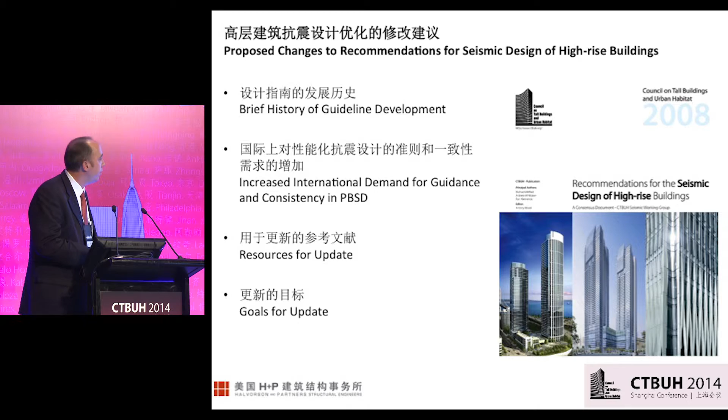Today I'm going to go through a brief history of the guideline development. We're going to talk a little about the international demand for guidance and consistency in performance-based seismic design. Then some of the updated resources we would have and goals for an update, and examples of what I would think should go into an updated guideline.

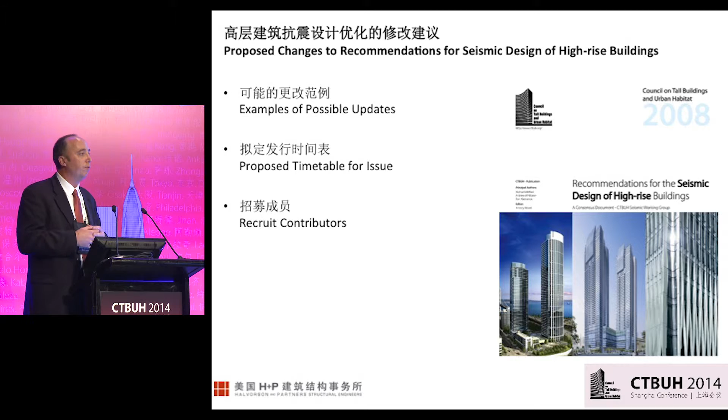A small group of authors would actually finally decide that and prioritize it. But then talk about proposed timetable and recruit contributors. I'm going to be here all week. I've already twisted Ron Klemencic's arm, so I think Ron is going to help out again also. My hope would be that people would come forward and talk about it, and see if they were really interested in helping out.

The original guidelines were produced as a result of a seismic working group formed in 2007. The co-chairs at that time were Ron Klemencic, Michael Willford of ARUP, and Andrew Whittaker of SUNY Buffalo. It outlined a performance-based seismic design approach for tall buildings.

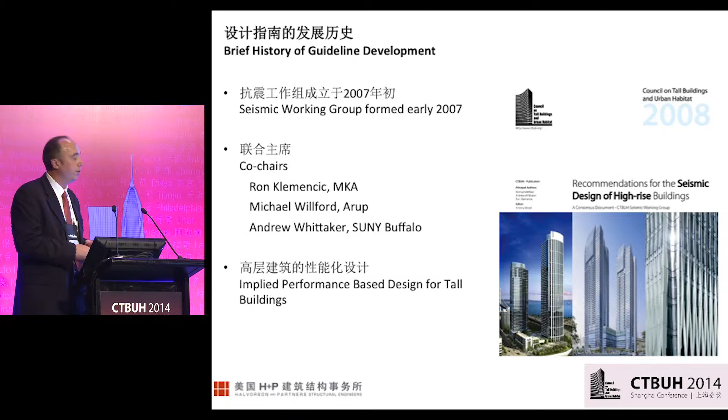The draft was published in early 2008. It was peer-reviewed, and the idea with the new guidelines is that it would also be peer-reviewed by a larger group that would hopefully be international, completed in August 2008, and published.

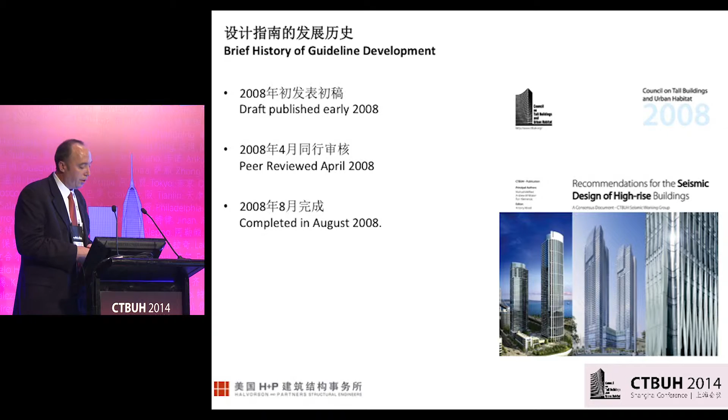Why focus on performance-based design for tall buildings versus prescriptive design rules? The idea is that you're dealing with structures that are well over 1 second in their period, so the code and prescribed rules are more geared toward shorter period structures.

Significant mass participation is in higher modes, and a larger proportion of the drift is due to cantilever action. So some of the interstory drift constraints and established criteria are based on shorter buildings where cantilever action is not as significant.

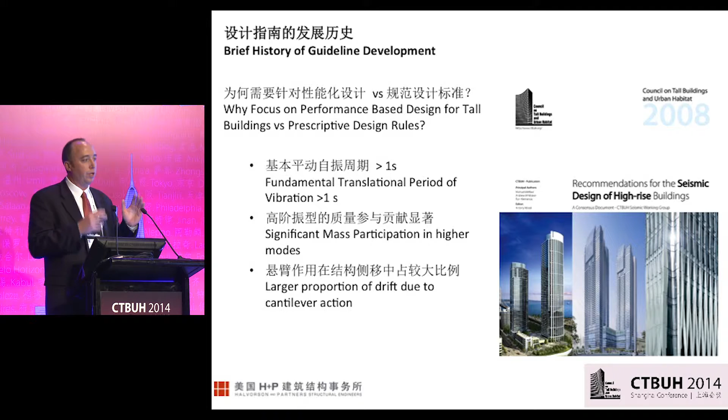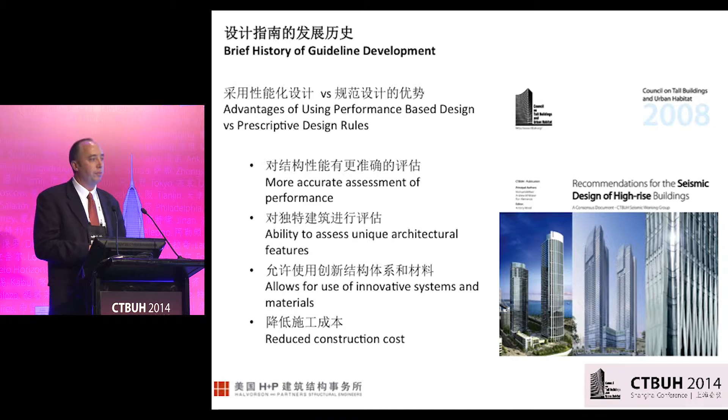The advantage of using performance-based design is a more accurate assessment of performance. It gives you the ability to assess unique architectural features and unique projects and structures. It allows for the use of innovative systems and materials, like what we were talking about this morning with supplemental damping, and here we've touched on a few cases of base isolation, and hopefully it reduces construction costs.

More disadvantages: it is more labor intensive and requires more time to complete, and it is a more extensive review. So these need to be taken into account in the schedule.

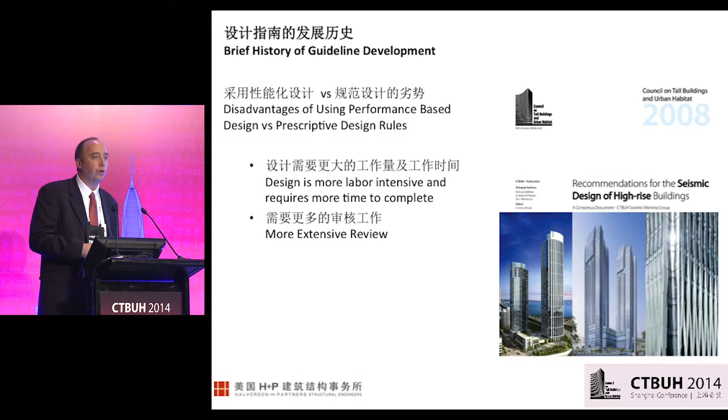Performance-based design should be an alternate or additional analysis and design method. International standards are moving towards having performance-based design for tall buildings as an alternate design method. Prescriptive local design rules and protocol are well established, and recommendations should be framed to offer this up as an alternate design, in my opinion.

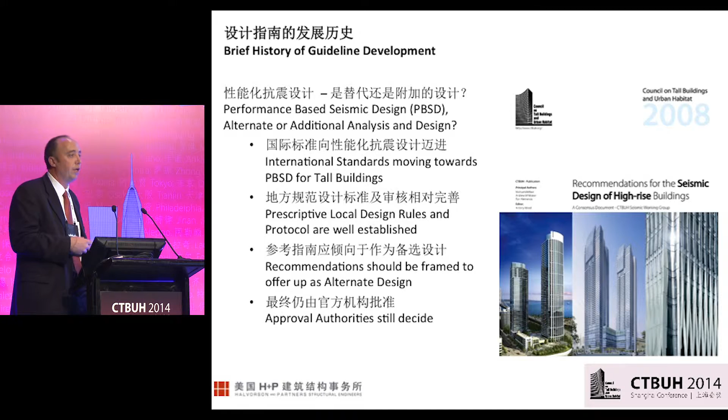But approval authorities still have to decide. Obviously you're dealing with places where the protocol and prescribed methods are very well defined. You can't mandate something like this.

There's increased demand for guidance and consistency in performance-based design. It's a rapidly developing field. The U.S. has significant projects now completed, and there's a few projects on the West Coast that now have been completed.

In China, the level of documentation has substantially increased. Most of my experience is actually with performance-based design working in China, and compared to what I had to document 8 years ago for an expert panel review compared to now, there's a lot more documentation that's actually included.

I'm also a member of the Earthquake Engineering Advisory Group for IStructE. They're looking at trying to get that institution more involved in international work. That institution has a number of members coming from China now who are looking to be licensed as IStructE. So IStructE sees that the influence of having more Chinese members is going to be necessitating them to learn and to be more involved in earthquake engineering internationally.

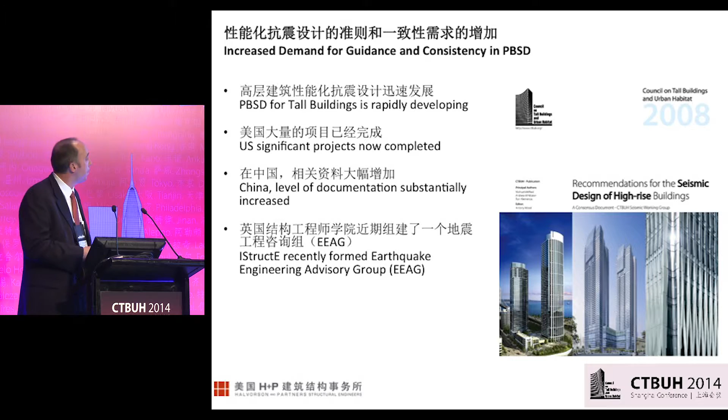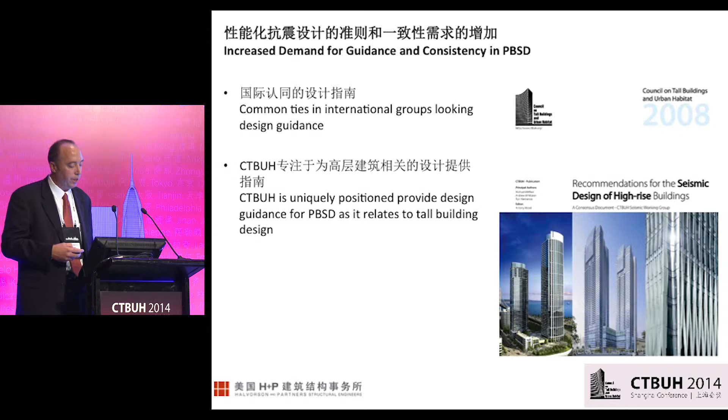There's common ties in international groups looking for design guidance. What I would say is CTBUH is uniquely positioned to provide design guidance for performance-based design as it relates to tall buildings. Some of the more recent updates exist now that didn't when the first guidelines were published in 2008. There's good general discussion on topics, but at some point they would bring up items that should be considered but didn't give a lot of design guidance on how they should be addressed.

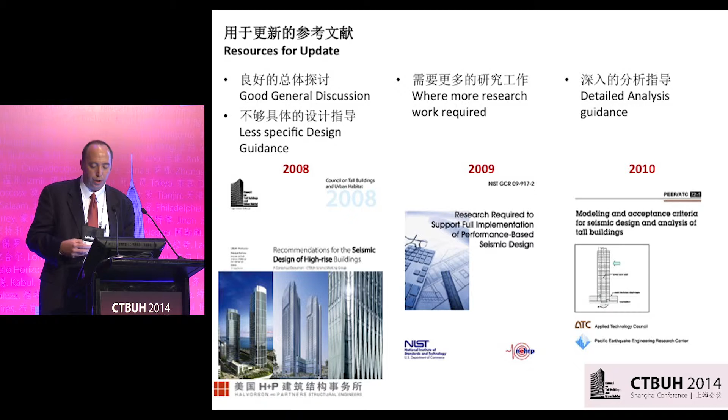In 2009, NIST published a report on research required for support of full implementation of performance-based seismic design. This document was used to produce a number of additional studies, one of which is the ATC 72 document, which details analysis modeling rules and guidance for performance-based design.

The PEER document was published in 2010, and this is a pretty extensive document that gives guidelines for performance-based design of tall buildings. This document is referenced by other documents too that have been updated. And then also in 2011, design guidance was given for selection of seismic input, giving some design guidance on picking time history records and getting the input right for time histories.

Additionally, in 2013, ASCE 41 was published, an updated version of that code. In that code, there's a lot of guidance given for component performance objectives, and that's a code I've seen referenced in some of the work we've been working on in China.

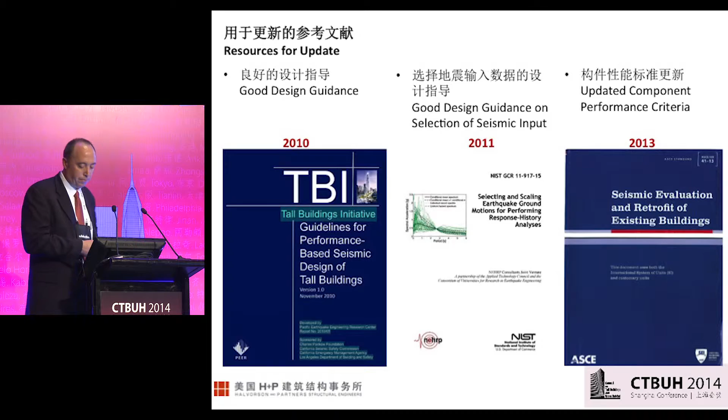But probably the best and latest document that's come out has been a 2014 publication from the Los Angeles Tall Buildings Structural Design Council. This is an affiliate member of CTBUH, and it's an alternate design procedure. The design guidance is good because it's based on the latest resources. It's a succinct design publication, only about 50 pages, but it's geared to designers and meant to be kept brief with good design guidance. Its focus is for designers, and practical simplifications are given for modeling.

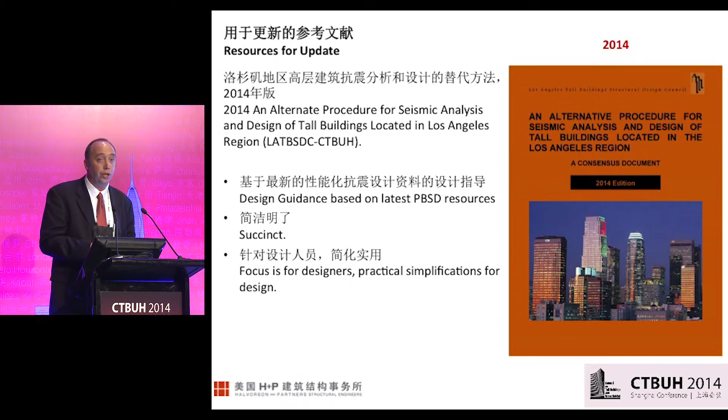One of the questions is whether the goals for the update should be an update or a rewrite of the current recommendations, and I think that's to be determined. Depending on who the authors are and how many are in the group, we'd make an assessment of whether we should be updating or completely rewriting. The final decision will be made by that group, but in order to make the document useful, a different flow may be required.

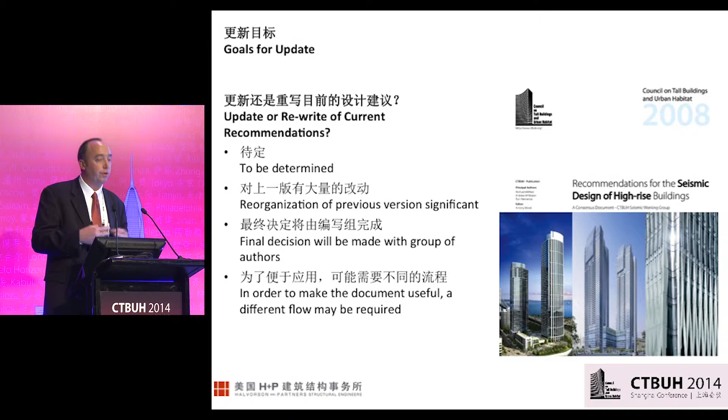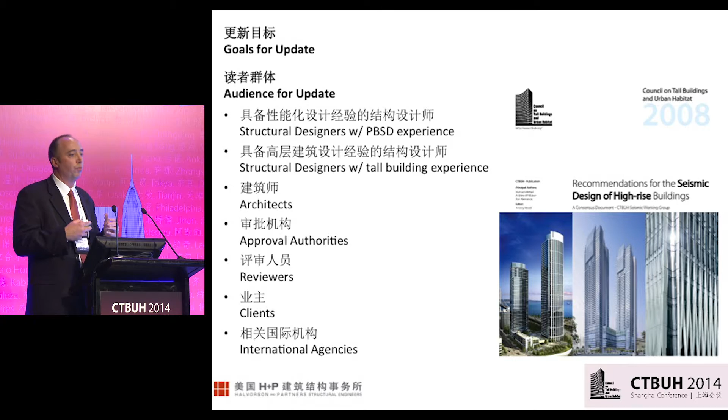The audience for the update, one of the ideas would be structural engineers doing performance-based design work, structural engineers with tall building experience, architects working on these types of projects, maybe approval authorities and reviewers, and even clients, so that they have an idea about how this type of design work influences schedule.

Focus recommendations should be on tall buildings. Performance-based design is used for all types of buildings, but the design guidance we're going to be offering is really going to be focused on tall buildings. And we should define when this type of design is required. Most codes have some type of height limit that requires an over-limit definition. This guide should also go into that and give a recommendation on when they think it should be used, and present it as an alternate procedure, but allow recommendations to be referenced as additional measures.

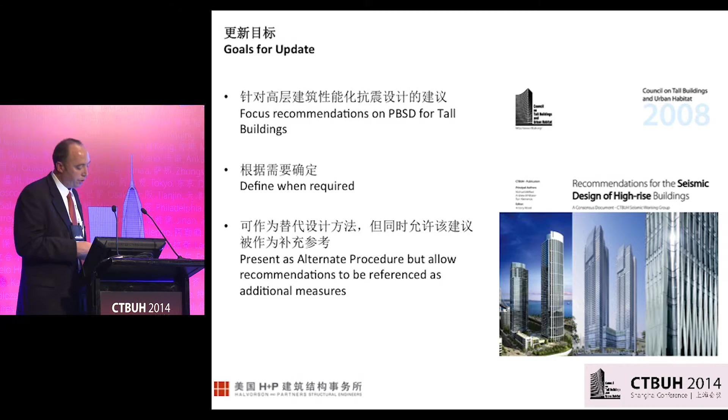Update it to reflect the current best practice. Another goal was to educate tall building experts with limited performance-based seismic design experience, bringing in a whole group of people who haven't done a lot of work in this field.

For instance, CTBUH is full of people doing this, and one of the ideas that organization has is actually issuing a publication like this as well. And then provide rules for consistency in performance-based seismic design analysis and reporting of results.

So much data is created when you do this type of work that one of the things you need to do is provide some guidance on consistent assumptions that should be made.

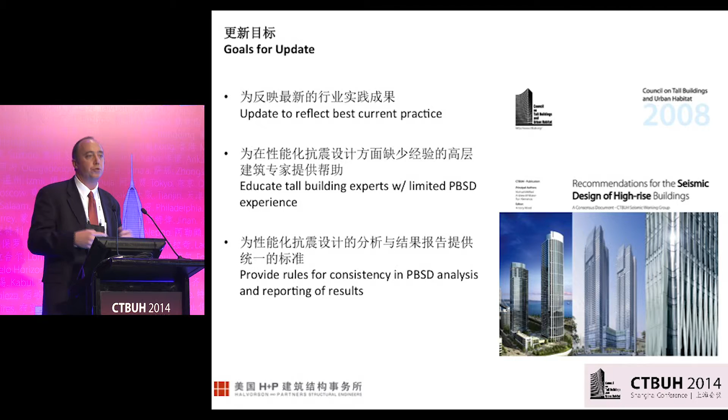Distinguish between performance-based seismic design and prescriptive rules. Some prescriptive checks still come into the design process, and the idea would be to define those and really distinguish them from true performance-based design.

Add figures and illustrations to make things easier to describe. Establish a format for the design criteria and suggest ways that criteria could be presented in a report.

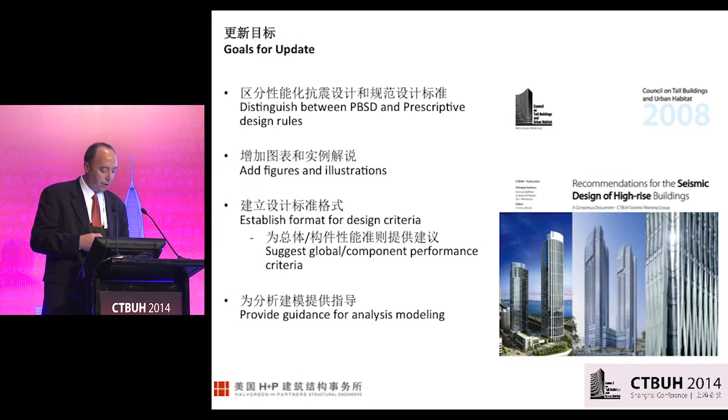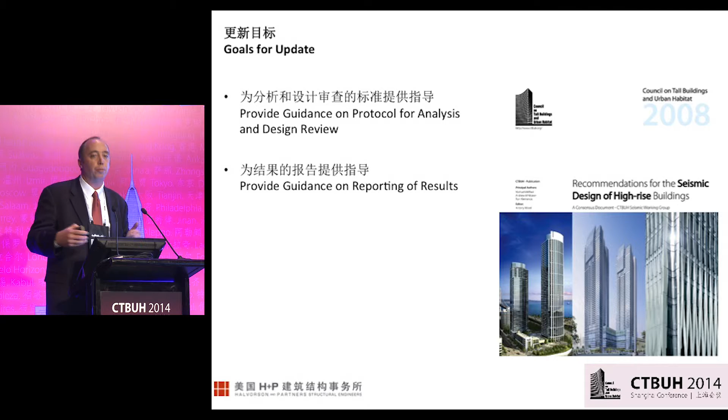Also provide guidance for analysis modeling, guidance on protocol for analysis and design review, and guidance on reporting of results. When you're doing this type of documentation, it's a large volume of work, so give some guidance about what elements should actually be shown and documented.

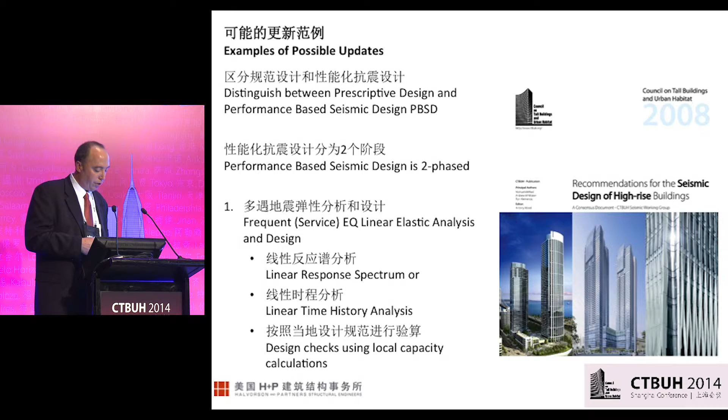Examples of possible updates. One idea was that many publications define performance-based design as just two-phased, consistent with the Chinese approach too, with expert panel review and over-limit design. There's a service level earthquake with linear elastic analysis and design, done by response spectrum or time history, and design checks using local capacity calculations.

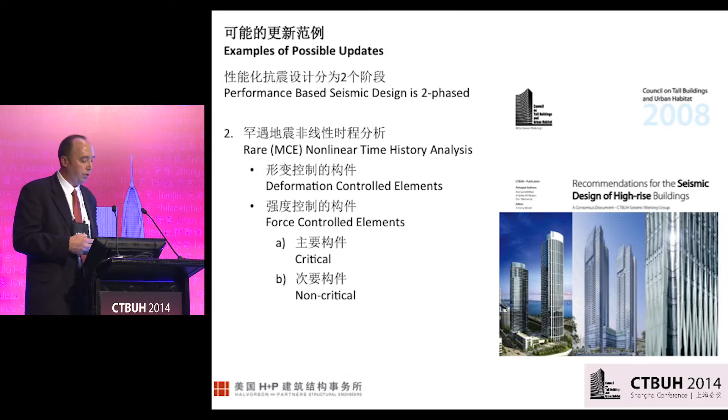Performance-based design then usually has a second level of analysis and design that takes into account the rare or maximum credible earthquake loading and nonlinear time history analysis, where you either define deformation-controlled elements or force-controlled elements, and then between those, even critical or non-critical elements.

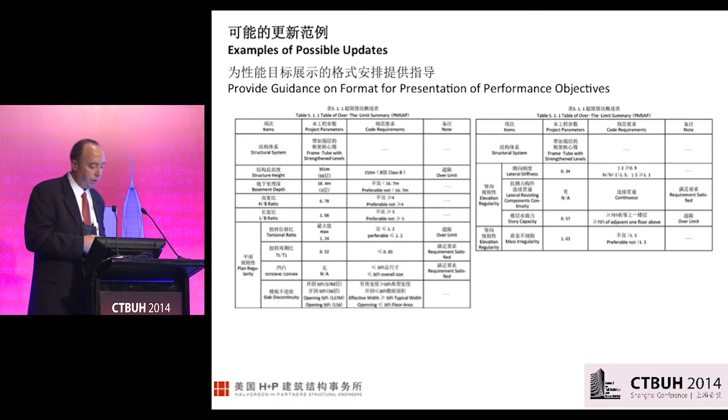This is pulled from performance objectives that were presented for global behavior, and this might be an example of a format that we could show in the report.

Taking that to the component level, where you distinguish between force-controlled actions and deformation-controlled actions, and reference different guidelines that are used for that.

ASCE 41, for instance, has a lot of material about deformation-controlled actions, for link beams or elements that are dissipating a lot of energy.

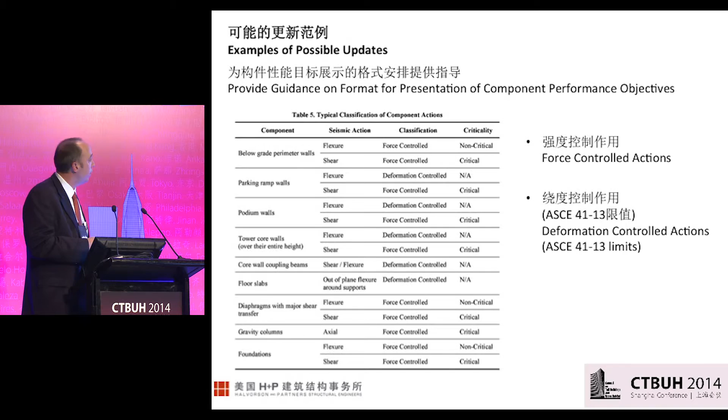And then this is a possible format, similar to one we've also produced before for expert panel reports.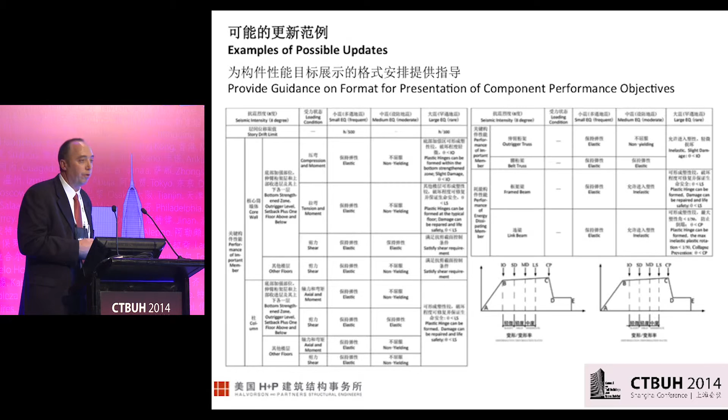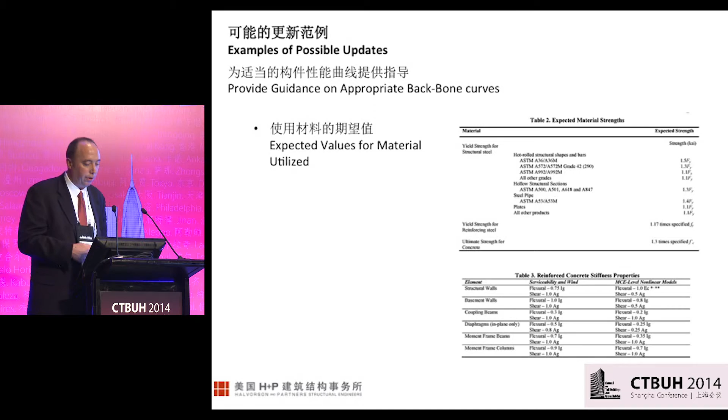When you're dealing with creating and modeling analysis for nonlinear analysis, expected values for material are utilized. So an idea about formatting that and setting it up as a more defined set of material properties.

Talk a little bit about how backbone curves are created and put this into the publication to give more design guidance on how they might be modified to take into account cyclical loading.

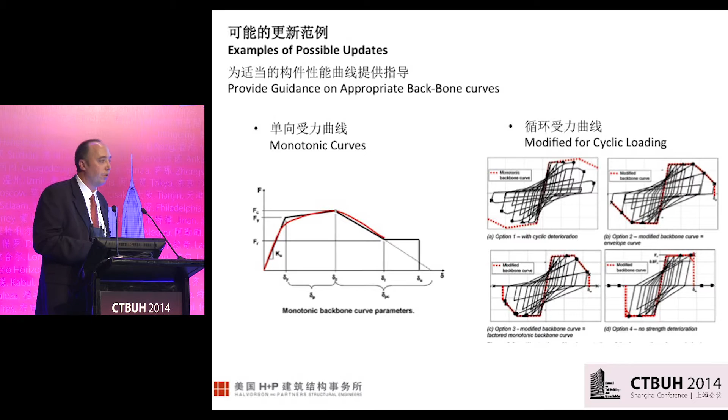And then address some of the issues that always require judgment calls by structural engineers, such as soil-structure interaction and how that should be taken into account in the design, and also how the backstay effect should be taken into account in analysis, modeling, and design.

Typically, from some of the other recommendations, particularly the newer performance-based seismic design analysis, they recommend bracketing the answer to take into account the backstay effect, by changing stiffness on the diaphragms.

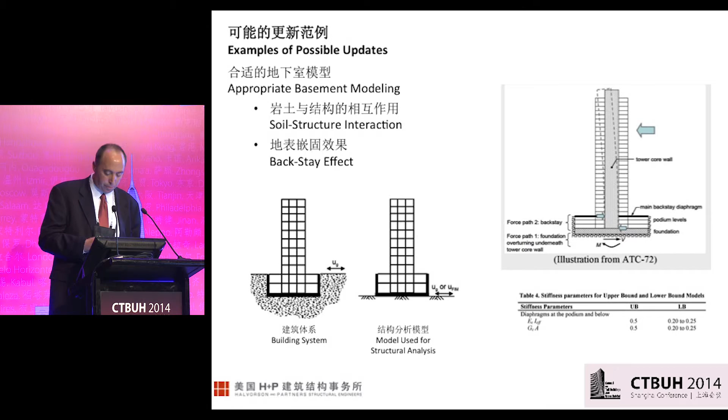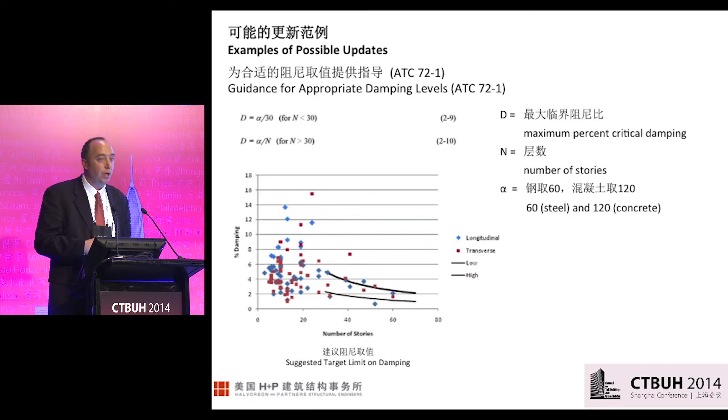Also, what's come up in some of the talks today has been the issue of damping, and what's the appropriate level of inherent damping to be included in the nonlinear analysis. There are some provisions and guidance given for that in ATC 72, and some of those documents we've actually been referencing in our work already.

And then also get into the idea about how areas that are strengthened zones should actually be modeled to ensure that we're getting the appropriate behavior.

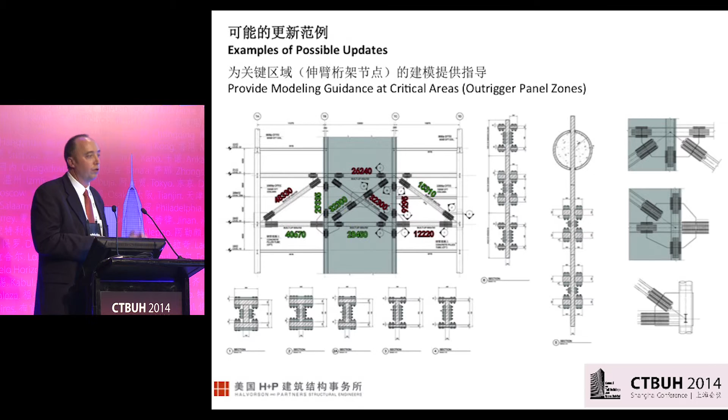This is traditionally, when dealing with outrigger systems, you always have large localized panel forces. So the idea is setting up criteria for modeling that, so you can appropriately model and get the appropriate loads into the embedded steel.

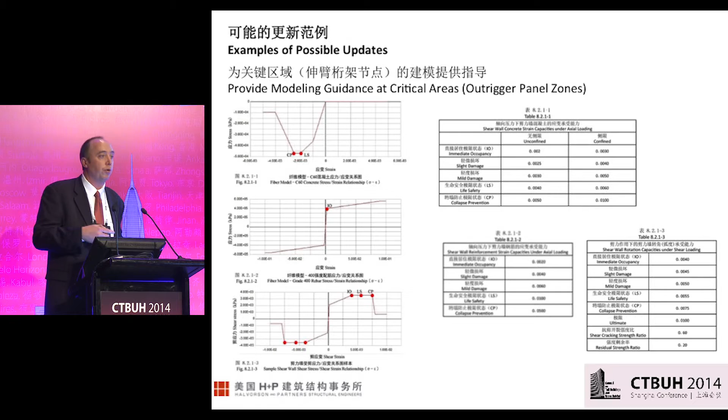One of the issues is, of course, with any type of analysis you're doing in this high seismic zone, getting the input correct. So the publication published by NIST gives a lot of information and direction on selecting and scaling appropriate time histories.

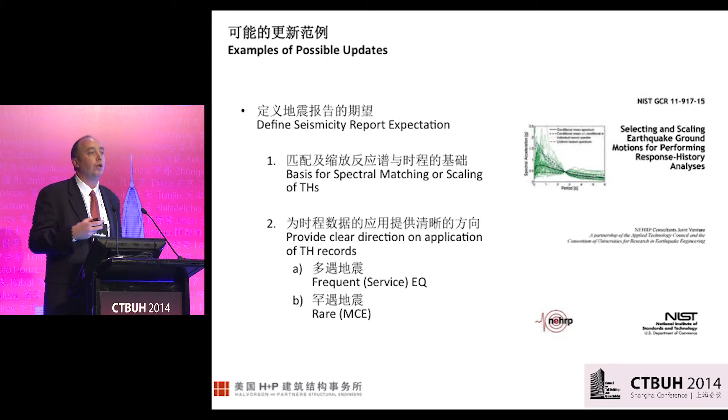So look at that and describe what would be the basis for spectral matching or scaling of time histories, and also provide clear direction on application of time histories, both frequent and rare, and when direction actually makes a difference or not for near field events.

Provide guidance on reporting of results. When you're talking about nonlinear time history analysis, you're dealing with time history analysis with a 0.02 second time step, usually on that order. And when you've gone through a whole record, you basically have 2,000 different results on every single element in the structure.

So some idea about how those results should be formatted and presented, and also some direction on clear design criteria that should be used. And what's the appropriate level of documentation for frequent level checks and also rare level checks. It's a major undertaking, but case studies really do help in most of these conditions, so the idea might be to supplement this work with case studies showing how the guidelines should actually be provided or applied.

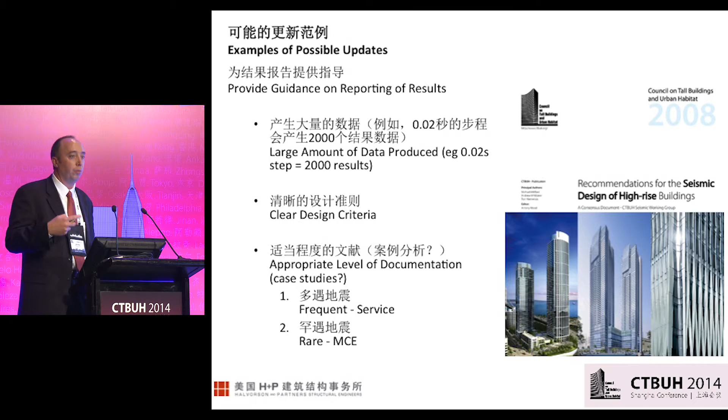Then provide guidance on the review process. The review process is very well established here in China already, but the idea would be that, in some of the documents published recently, they give some guidance on the minimum number of people who should be involved in the peer review process. And an idea about having at least a geotechnical engineer who would deal with the seismic input, a structural engineer with expertise in the field, and then also maybe a researcher or an expert who has expertise in this particular system being proposed.

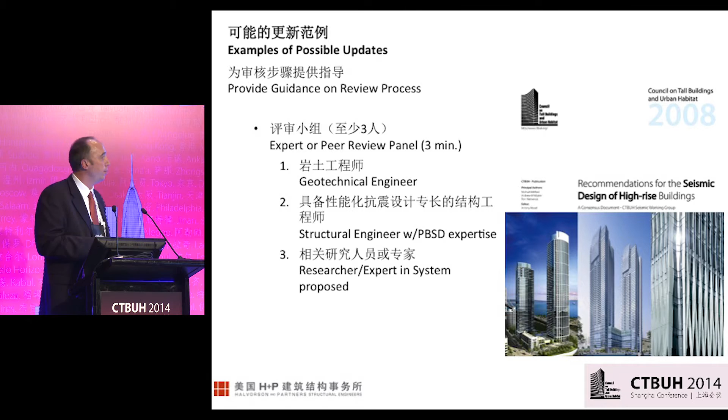Provide guidance on the design process, and this might be really useful in particular to clients, so they understand how it impacts the concept design schedule and schematic design schedule, and when criteria should actually be presented to experts for peer review and when not. Also, in the design development, what should be produced as far as the performance-based seismic design report, and when that should occur in the schedule. And then the follow-through of that, how that is realized and how any comments from the experts or peer reviewers are realized through the whole process.

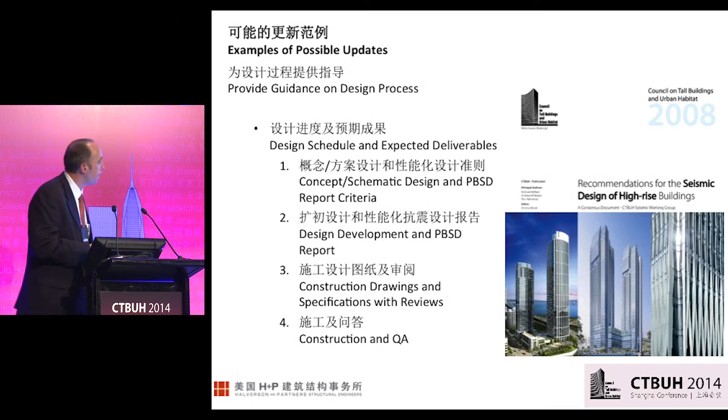One of the issues with review is also the idea that the engineer of record has a certain responsibility, but also the reviewers need to be accountable for having a review process where they bring up more broad items, and the review becomes more detailed as the process goes along.

Because there is such an amount of analysis and design work required, and it's very labor intensive, the idea that you could go backwards and start with a more fundamental question too late in the process can have a really negative impact on the project.

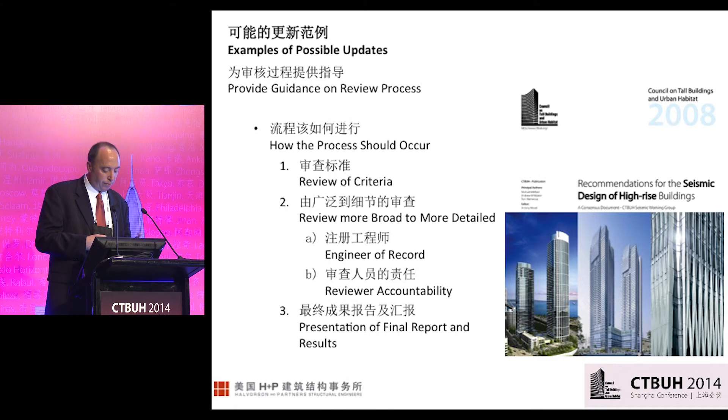And then presentation, final report, and results—an idea about how that should be presented and what it should look like.

Some ideas for a timetable, and this is pretty aggressive, but the idea is that we're kicking this off right now during the conference and workshop. Through November, maybe establishing a group of primary authors. In December, the authors would prepare for a meeting at CTBUH in Chicago, or by video conference in their office in Shanghai I guess now, and draft initial outlines. In January, we'd have that initial meeting.

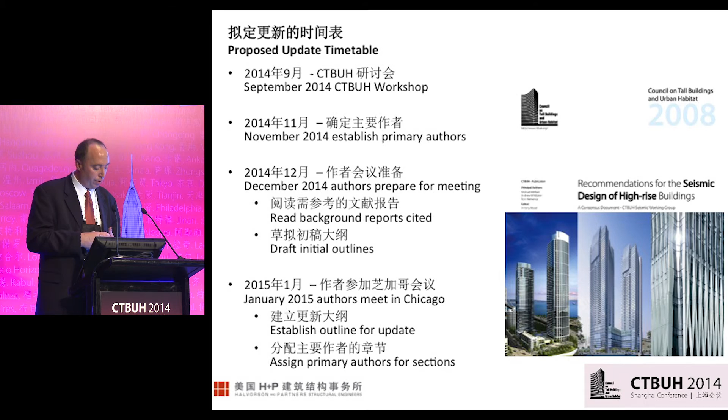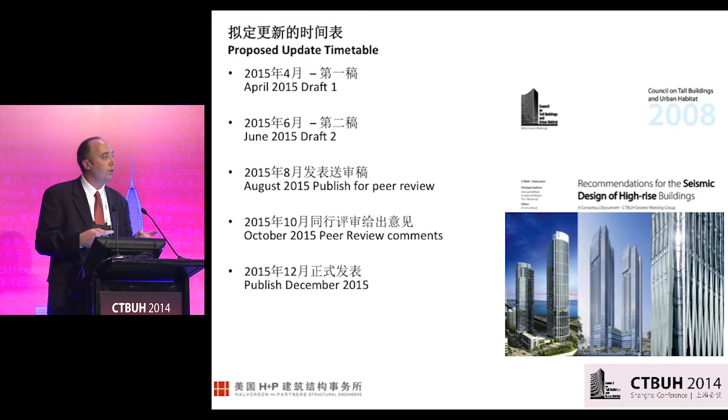These are just initial drafts that I put on a schedule, hopefully with a publish for peer review in August 2015, review comments back in October, and the publishing of the updated guidelines in December 2015. But all this schedule would be coordinated with the primary authors when that meeting occurs.

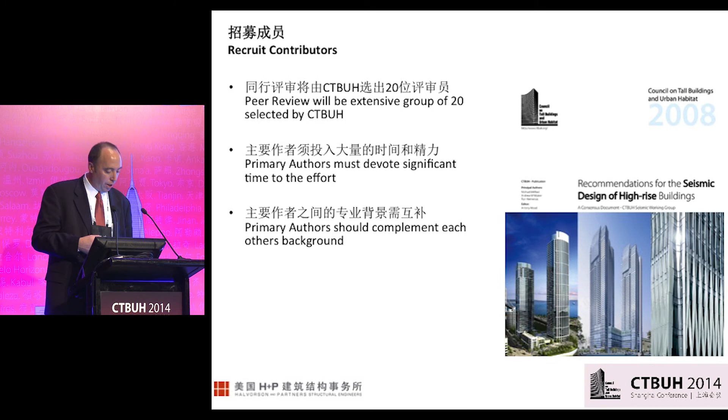So the last thing I'd talk about is recruiting contributors. The peer review process will be extensive. There'll be a group of 20 selected by CTBUH, international, with influences from design all around the world. The primary authors must devote a significant amount of time to the effort. There's a lot of work involved, so what we're going to solicit is people who aren't just going to be doing a review process—people who are actually really producing work, and primary authors should complement each other's background.

We're looking for structural engineers with performance-based seismic design experience, tall building experience, and international building experience, and geotechnical experts.